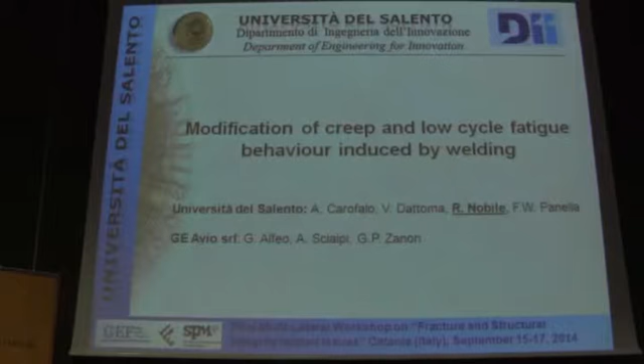I present you some results that we obtained in a research activity that we carried out at the University of Salento in collaboration with an industrial company, GE Avio.

What are the motivations of the work? The increase of service life of components in the industrial field is an important challenge.

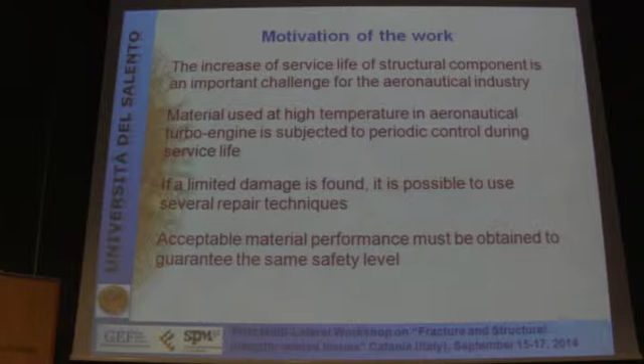In case of aeronautical components where periodic controls are usual, you can sometimes find damage. So it will be possible in theory to repair it and increase the fatigue life of the components. Obviously, we need the same safety level to be guaranteed to the component.

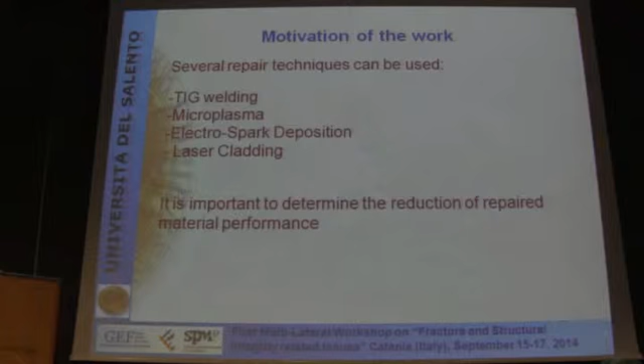A large number of techniques to make a repair can be found in literature and in practice, for example TIG welding, microplasma, electrospark deposition, laser cladding. In all these cases, it is important to determine the reduction of the repaired material performance.

In this work, we considered as a repair technique TIG welding, and we considered the case of a nickel-based superalloy, Waspaloy, which is very diffuse in the aeronautical field.

To do this, we performed static, low-cycle fatigue and creep tests on the base material and on the TIG welded material.

For the test, we consider a laminate plate because this condition is more similar to that of a material used for large axial symmetrical thin shell components, like casing of turbo engines.

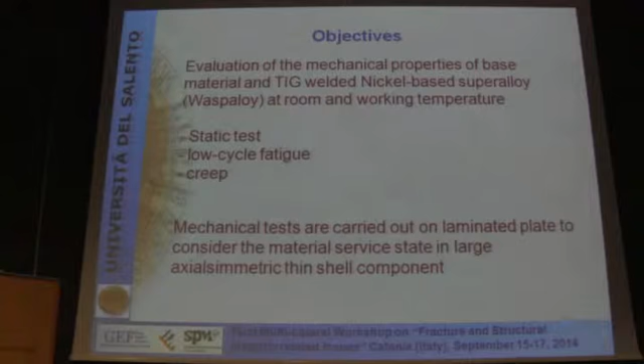Generally speaking, thermomechanical damage is the most limiting factor of nickel-based superalloy components, and this damage is associated with nonlinear behavior of the material under usual service loads.

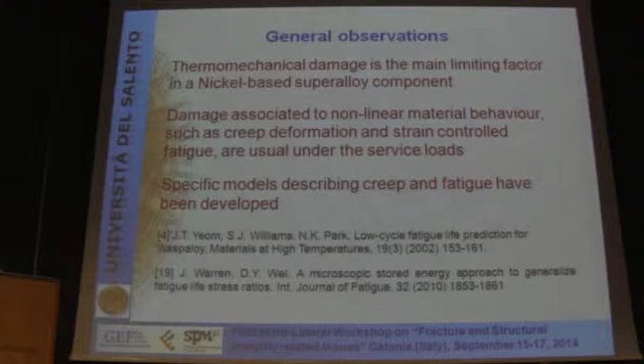A lot of models exist in literature to describe this damage mechanism, and these are some examples. But all these models have a limitation: they are developed and experimentally verified only for high strain level in case of fatigue, and for high stress temperature conditions in case of creep.

So if we try to extend the predictions of these models, we obtain unrealistic predictions, or in all cases it is very difficult. So there is a lack of knowledge about the real condition in which an industrial component is used, where nonlinear behavior is moderate.

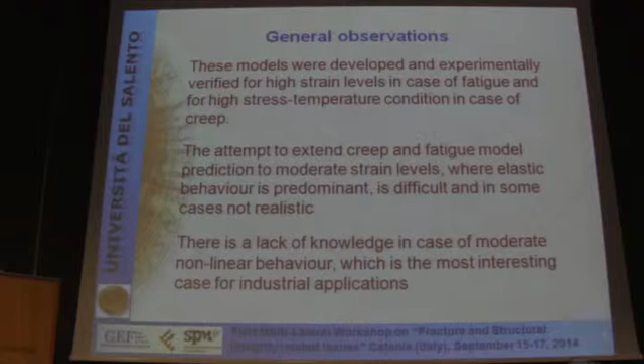The material that we considered for this research was Waspaloy. We considered a 3.1 millimeter thick plate. The microstructure is a face-centered cubic matrix with dominant precipitate gamma prime.

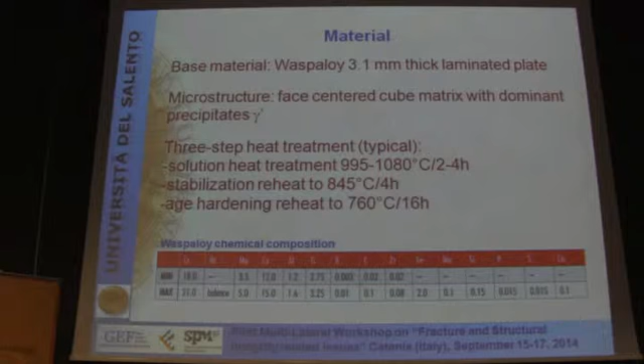Generally, this material is used after a three-step treatment: a solution treatment, a stabilization reheat, and an age hardening reheat. Temperature, time, and cooling conditions are varied to obtain better performance in creep strength or fatigue strength.

We used this plate to obtain several welded plates. The material was initially heat treated, then subjected to a solution treatment. After this, a TIG welding process was carried out, and after welding we carried out resolution and stabilization heat treatment, the removal of the welding cord, and the final aging heat treatment.

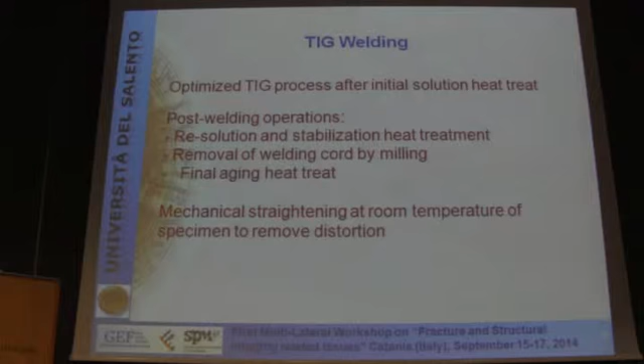In some cases, it was necessary to carry out a mechanical straightening of the specimen to eliminate distortion. These are some details about the geometry of the specimen.

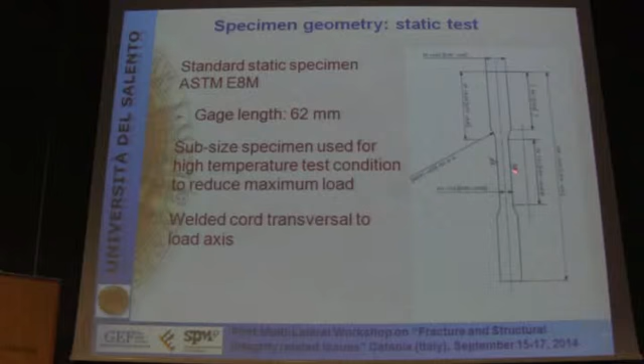This is the case of a static test using a standard ASTM specimen. The weld cord is transversal to the load axis and is located in the mid-size of the specimen for all kinds of specimen. This is the LCF specimen.

In this case, we used the recommendation of ASTM rules, but we had the need to increase the fillet radius because we observed several failures at the fillet.

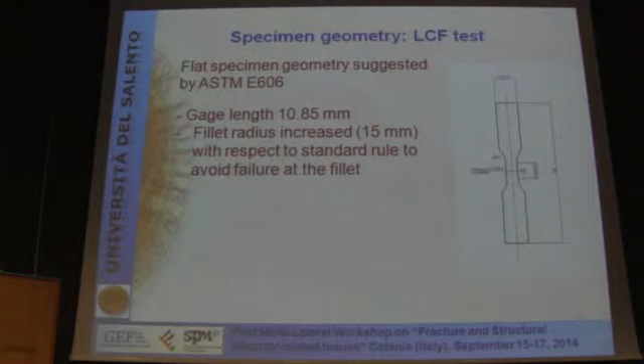Finally, this is the creep test specimen for flat condition, which is not standardized.

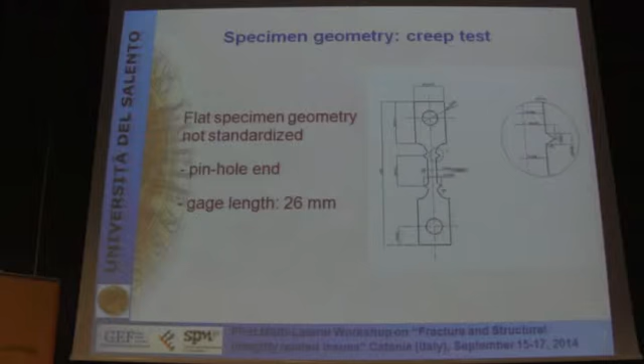Here you can see several details about the static test. We performed a static test at room temperature with a speed of 0.1 millimeter per minute, and we considered working temperatures from...

503 degrees to 760 degrees, with a test speed of 0.5 millimeter per minute. Only in the case of lower temperature did we use a sub-size specimen, in order to limit the maximum load that we obtained during the test.

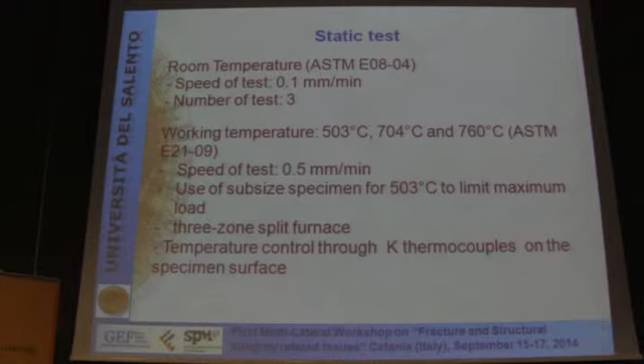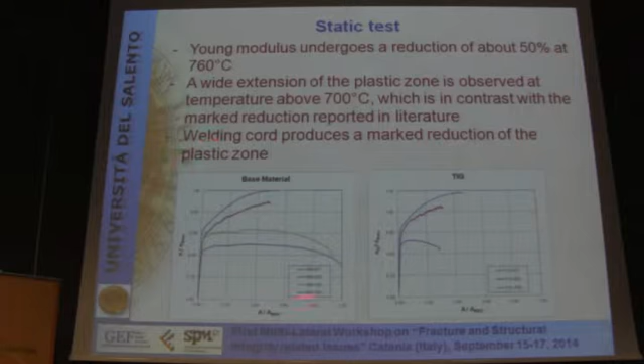Heating was obtained by a three-zone split furnace, and the temperature was controlled by K thermocouples located on the specimen surface. These are the results of the static test for base material and TIG welded material.

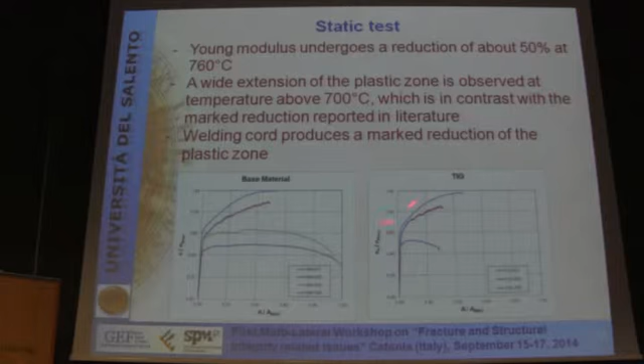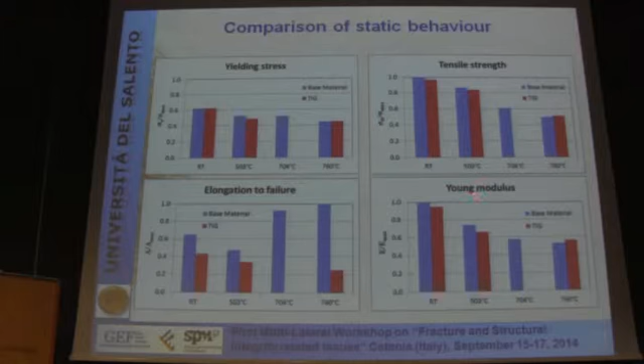The presence of the welding cord reduced dramatically the elongation to failure. Other properties are practically similar. In fact, if we compare yielding stress, tensile strength, and Young's modulus, the presence of welding cord is practically negligible, while elongation to failure is dramatically reduced, especially at the highest temperature.

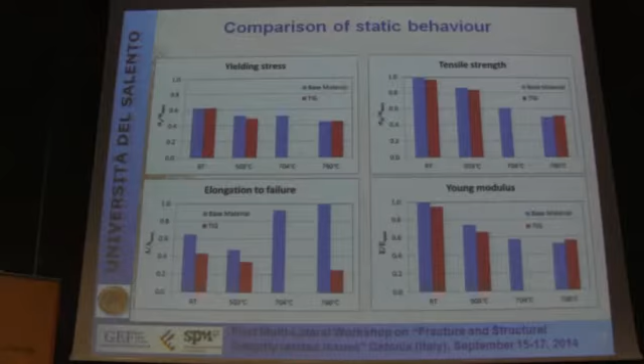Then we carried out a low cycle fatigue test in strain control. We used a triangular waveform and a frequency of 0.5 Hz. The strain ratio that we considered was 0, which is not so usual. And the applied strain range was very low, because the maximum strain range was 0.9%.

We considered a conventional failure when the maximum stress reached a decay of 10% of the load. And finally, we consider a maximum number of cycles of 10 to the 5 cycles. After this, the test is continued in load control.

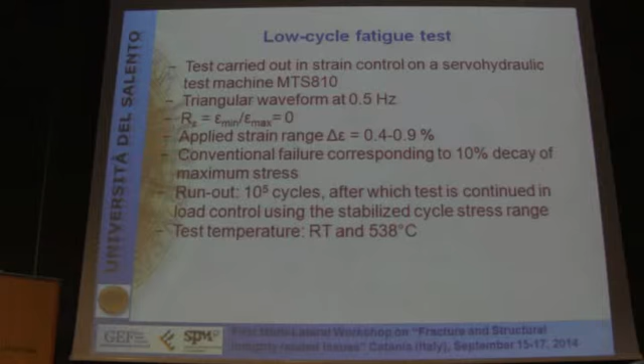At the moment, I will present you only these two temperatures, that are room temperature and 538 degrees. During the test, we recorded stress and strain data, load and deformation exactly.

We collected about 100 data points per cycle, so we are able to calculate for all cycles the stress range, the stress ratio, the hysteresis area, and the tangent modulus.

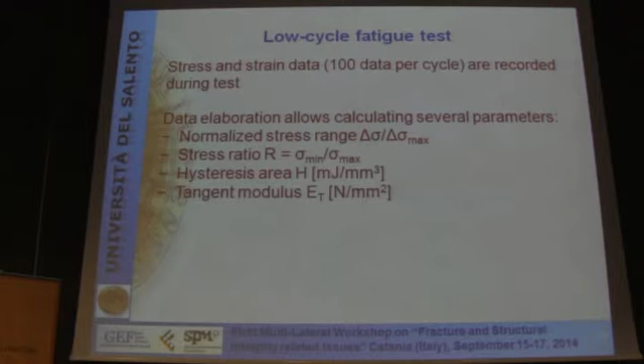And these are an example of what we obtain. Practically the hysteresis cycle is absent because we have a very low strain amplitude. In the first cycles, there is some plasticization. In fact, the stress ratio is negative.

Calculation of hysteresis area was affected by a large error. Only in few cases is it possible to consider the trend of hysteresis area against the fatigue life, and this trend was almost constant, both for base material and TIG welded material.

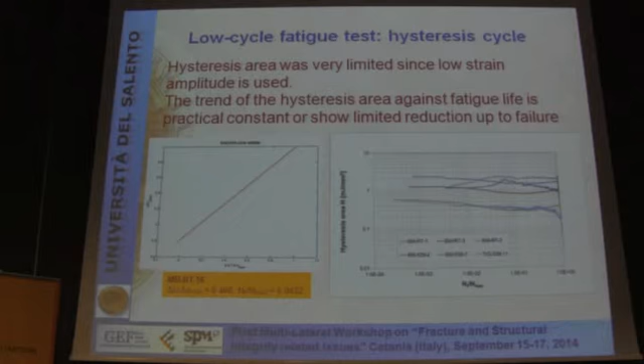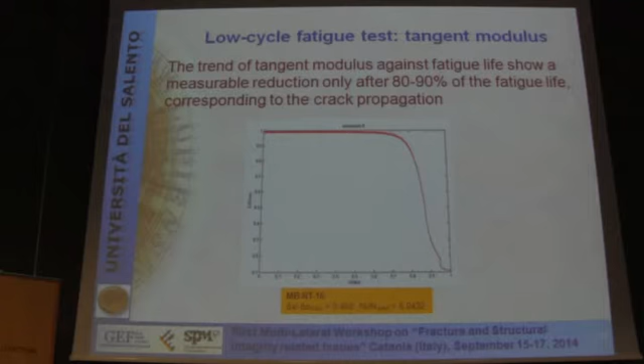Another trend that we can consider is the change of the tangent modulus. This is a typical trend, and we can measure a reduction of tangent modulus only when a crack is propagated. So it is not useful during the crack initiation phase.

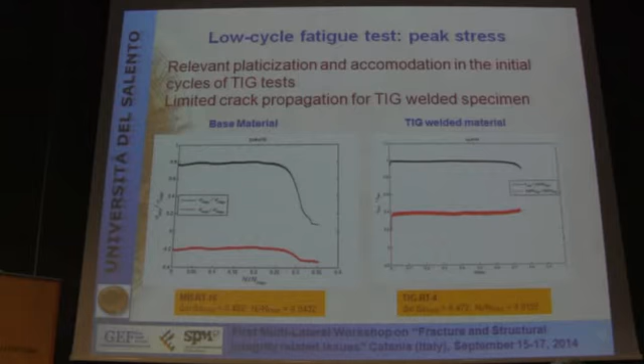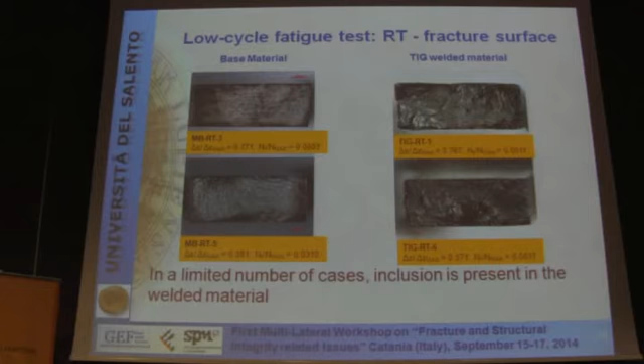Finally, the last result of the fatigue test was the fatigue curves, which we can express in terms of applied strain range, like in this case. And in this case, we observe an increase of the fatigue strength, which is very high at the working condition.

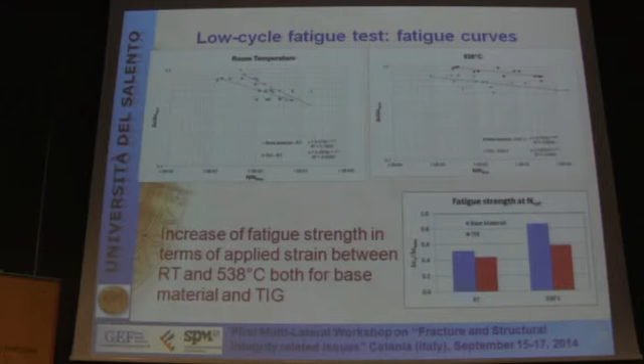The same curves can be expressed in terms of the measured stress range, and in this case the reduction is more limited in the hot condition, but we observe a high scatter here and here, both in room temperature and in working condition.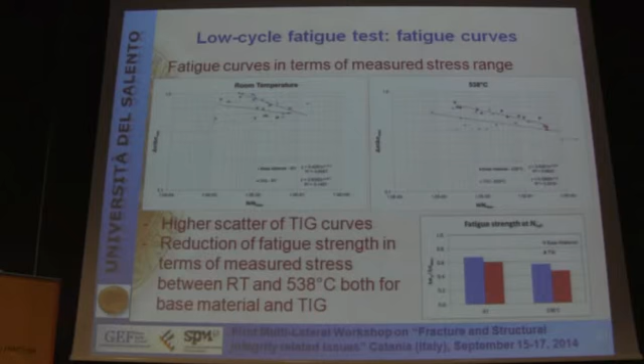Finally, we carried out also several creep tests. We considered two load levels and a temperature of 704 degrees. Base material tests were interrupted before reaching failure, and we observed tertiary creep only for the highest load level.

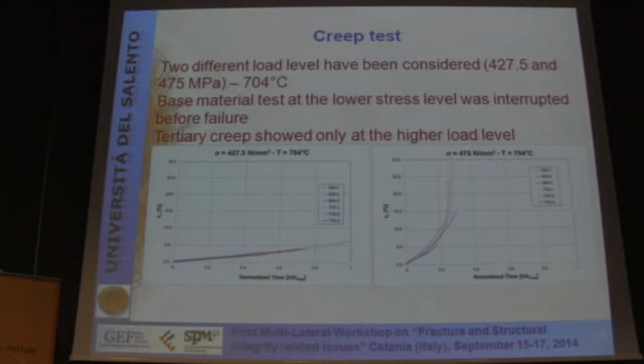The curves of the TIG welded specimen are practically coherent with the base material, and effectively, if we compare the time to reach a fixed creep deformation for base material and TIG material, this is practically coherent. The exception is the failure. In the case of failure, we observe a strong reduction of time to failure in both load levels.

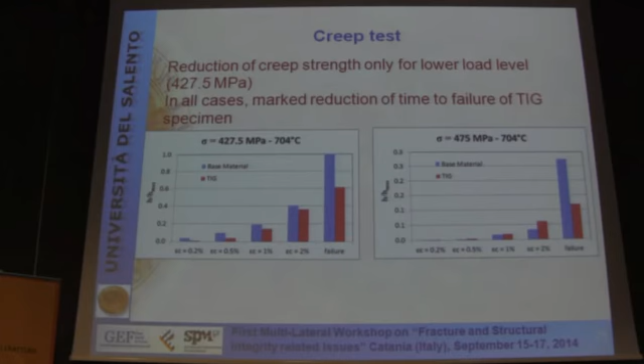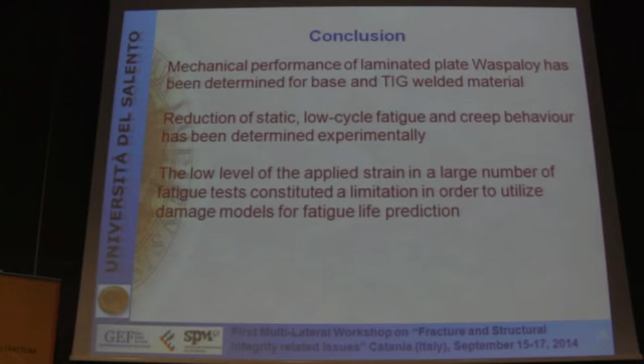In conclusion, we carried out several mechanical tests on the Waspaloy base and TIG welded material, and we determined the reduction of static, low cycle fatigue, and creep strength. The low level of the applied strain was critical in order to apply several models to describe the damage model of the material. Thank you very much.